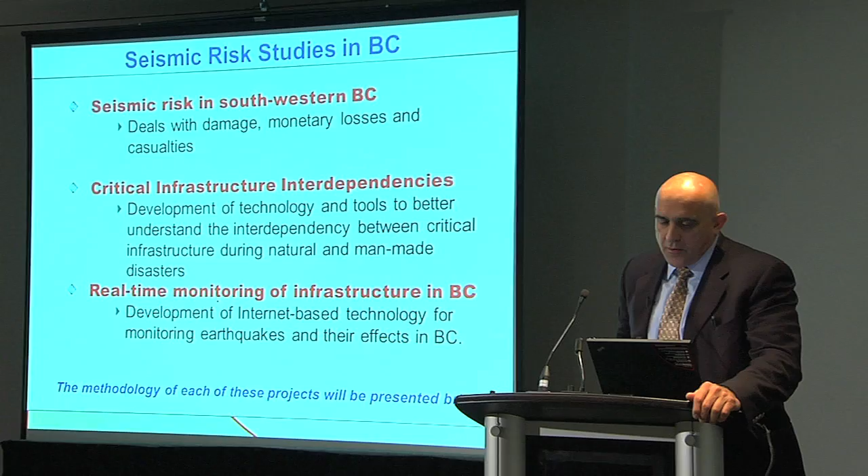So what I'd like to cover in this presentation are three topics, as shown there. Similar to what has been presented already, I want to talk about the seismic risk in BC. I'd like to give you a snapshot of where we are in terms of understanding the seismic risk, the work that we have been doing, and how we are understanding the potential effects of the earthquakes that John Adams and Gail talked about in the morning.

The second topic is a new topic that has become quite important in recent years. The government of Canada has been very, very interested in that. In fact, a number of years ago, they funded a project in developing the interdependencies between critical infrastructures. And I'm going to give you a short summary of what we have been doing, how we understand this concept, and why it's so important to start looking into this aspect as we are moving along in developing the science and the knowledge base that we have.

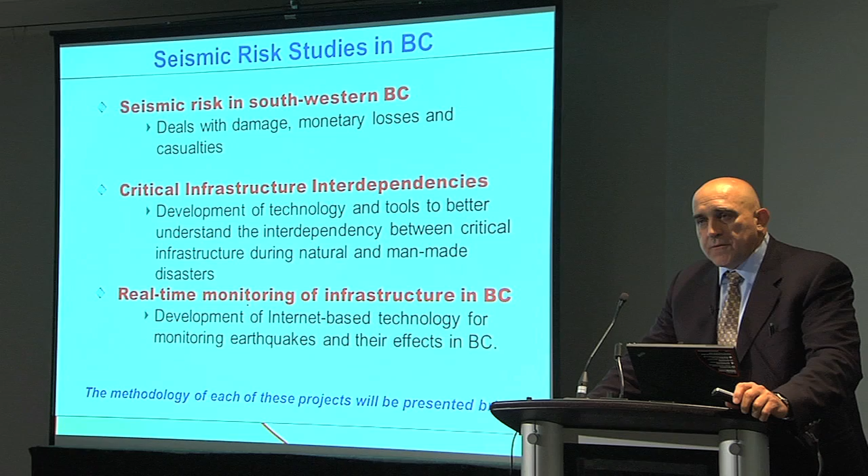And the last topic is one of the most exciting projects that we have in BC now that is related to real-time monitoring of earthquakes, notification and information that can be used by people that are interested in understanding earthquakes. Okay. So the first topic is risk.

There are many ways of looking at the risk, but if we just look at the risk in two simpler components, the vulnerability of the buildings and the hazard. And we have been talking about the hazard in different regions of the country this morning, and we understand that we have earthquakes, where they are, the type of earthquakes that are occurring in different regions of the country. But that's not enough just to say that we have a seismic risk.

We have to bring the inventory of infrastructure. I'm talking about buildings here, but that can also be related to bridges, dams, nuclear power plants, etc. All the built environment will have a certain level of vulnerability. And the combination of the two is what comprises what we call the seismic risk. So how do we deal with this problem?

First, just to summarize what we saw in the morning, we look at the probability levels of earthquakes and when they are occurring and the likelihood that they will occur in a certain region. Then we associate that with a certain level of peak ground acceleration, which is a parameter that engineers have used for a number of years as a design parameter, or another measure of the intensity of the shaking, the old traditional Mercalli intensity that is related to the level of damage that has been observed in a region.

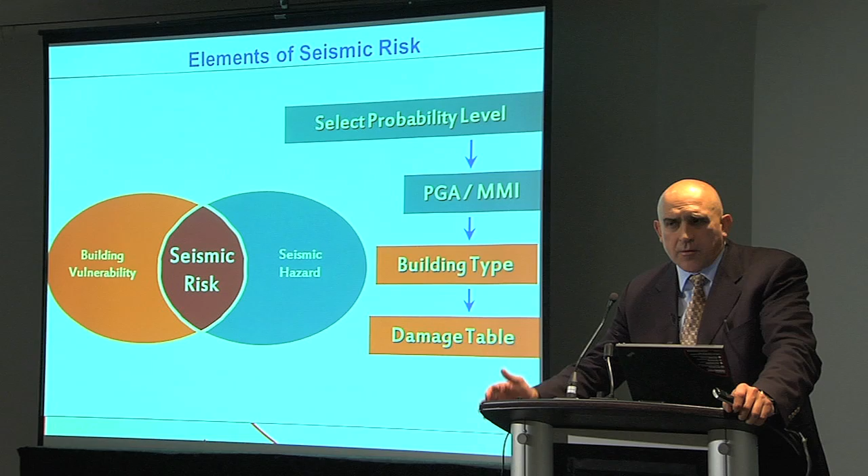A building could be so lightly damaged that people will be able to go back into the building and keep using it. We will call that 100% functionality: today the earthquake happens and tomorrow you can be at the building using it for whatever you need. Or it could be that the building is severely damaged, not only because the structural components failed, or the structural components didn't fail but the interior of the building is a mess. And you cannot use the building because it is not occupiable. So this is what we call the damage tables.

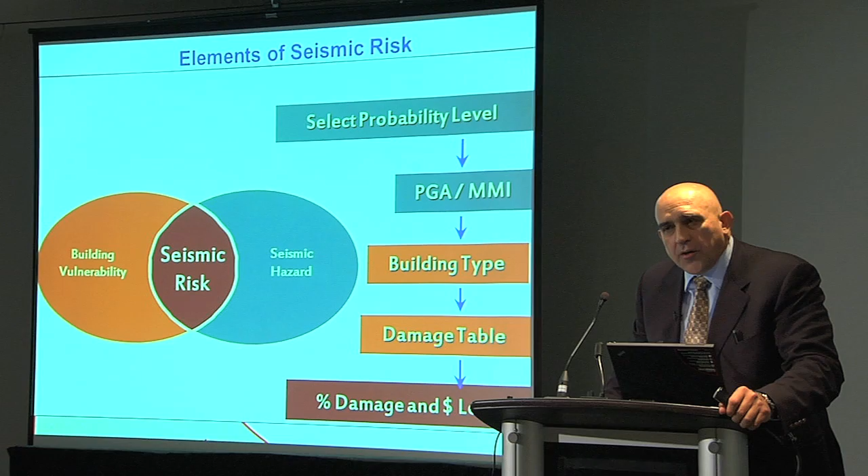And this comprises about 25,000 buildings that have been cataloged one by one. We developed thematic maps that show the distribution of the material that controls how the building will behave. For example, concrete, masonry, steel, tilt-up, etc.—stuff that engineers will love to have. Then we start seeing what regions, in this case Vancouver, have the type of material that dominates the construction.

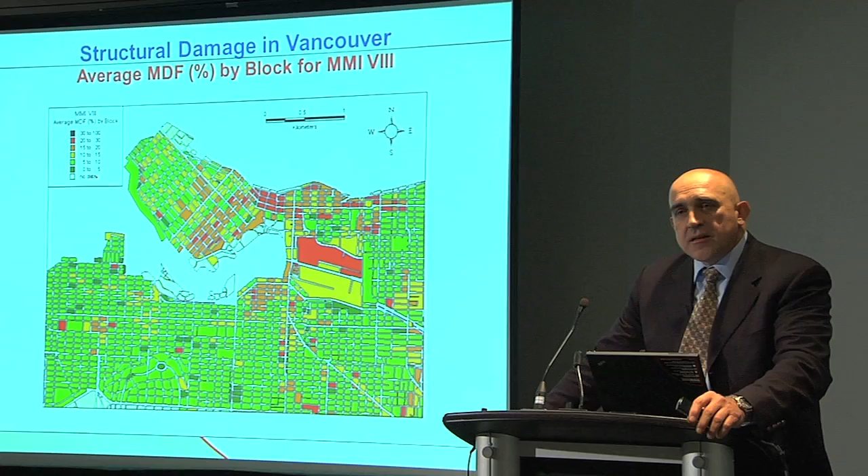That builds the inventory. Then we apply an earthquake, and in this case we assume an earthquake has happened and generated an intensity 8 on the Mercalli level, which really shows that there is going to be some severe damage.

And then we start seeing the maps of distribution of damage, in this case as a percent of the cost of the building. If the building costs $10 million, 10% will be $1 million in repairs. Then you start seeing the distribution of damage at different levels on the cost, and you can aggregate all of that to get an idea of how much it will cost to repair your buildings in that region.

And of course, then you start seeing areas, or what you call the hot spots. The red colors are areas where there is more significant damage than others. In this case, those of you familiar with Vancouver will recognize this is Gastown. It's an area where we have old buildings, and old buildings usually don't perform very well. Some of those buildings have not been retrofitted, and then you have the consequence there. But then you start looking at the overall picture of what had happened.

Darius talked about the soil conditions and the importance of that, and we can start bringing this into the model. Here's an example of Victoria, where first we do the analysis assuming the soil conditions are uniform across the lower mainland and the capital regional district. According to the building code, site class C is the classification we assume the whole of Canada is built on—that type of soil. But the reality is that we have different soil conditions.

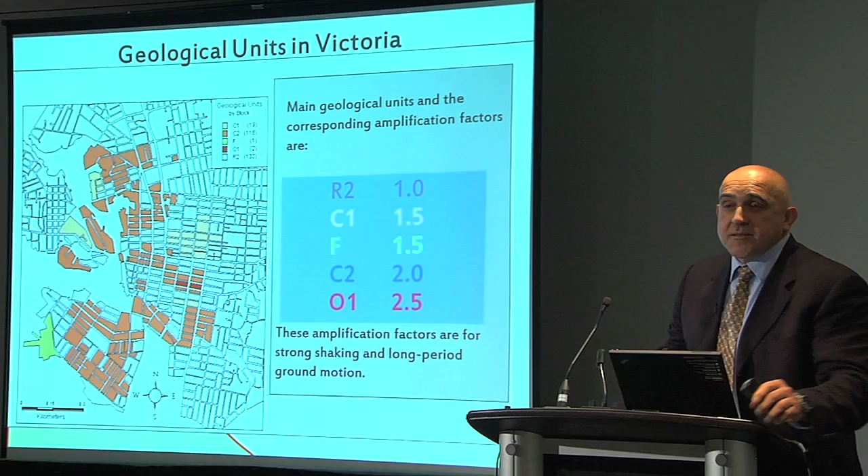Even in this small area in Victoria, you can see the variation of soil conditions. And of course, the red ones are the more critical conditions because of these types of soft soils. So I superimpose that effect in my map.

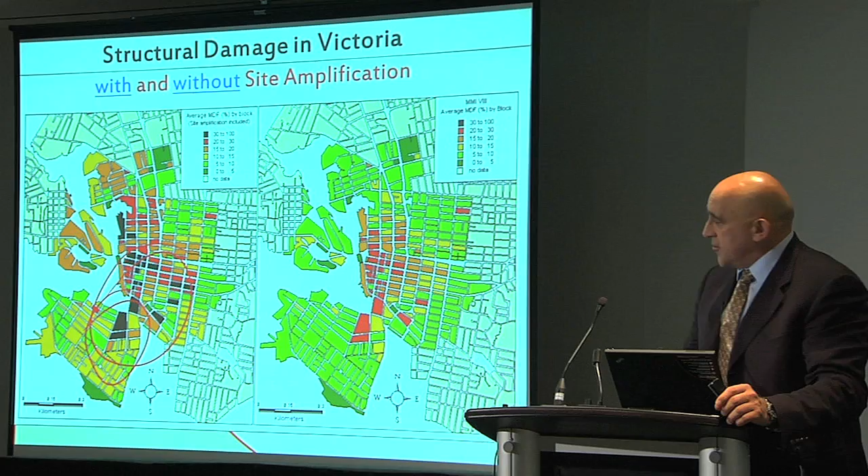And then what I have now is a comparison of the expected damage without considering soil conditions versus considering soil conditions. So I can immediately start seeing the effect of how important it is to consider site conditions in the expected performance of buildings, and get a better understanding of how the damage is going to be distributed in the region. And of course, you see that our provincial government resides here, and they are not in good shape. Then we start looking at how these monetary losses are distributed.

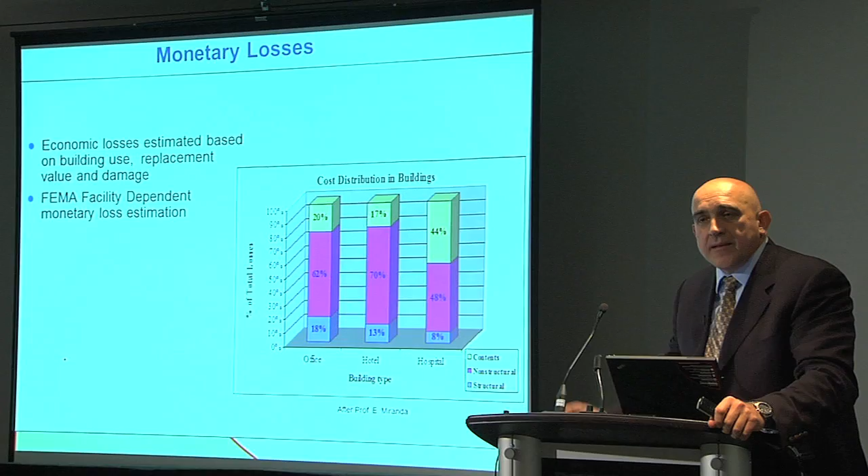Where are they coming from? This is a study done by Professor Miranda at Stanford that pretty much summarizes where the cost is coming from. Here is an example of typical office buildings, hotels, and hospitals. Although we engineers always concentrate on the structural damage, you can see that the most significant contribution to the cost of repair is the non-structural components—the inside of the building. I would say in general about 75% of the cost is associated with repairing inside the building.

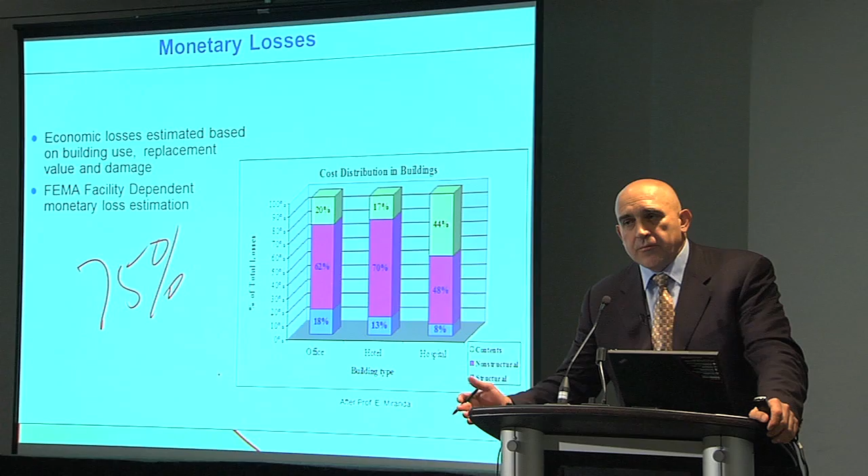So where is that coming from? From lessons learned from past earthquakes—studies that have looked at the damage distribution. For example, in a hospital, the non-structural elements and the contents become very important, because if they fail, although the hospital might be seismically adequate or have been retrofitted, if the contents fail, you cannot use the hospital. The hospital will not be operational, and that's not acceptable—it has to remain operational after the earthquake. So this is how we are learning more about this distribution.

Then we start looking more carefully at what these non-structural elements are and how they fail. Some of those elements are more sensitive to the level of shaking in the building. Others are more sensitive to the displacement between the roof, the floor, and the ceiling.

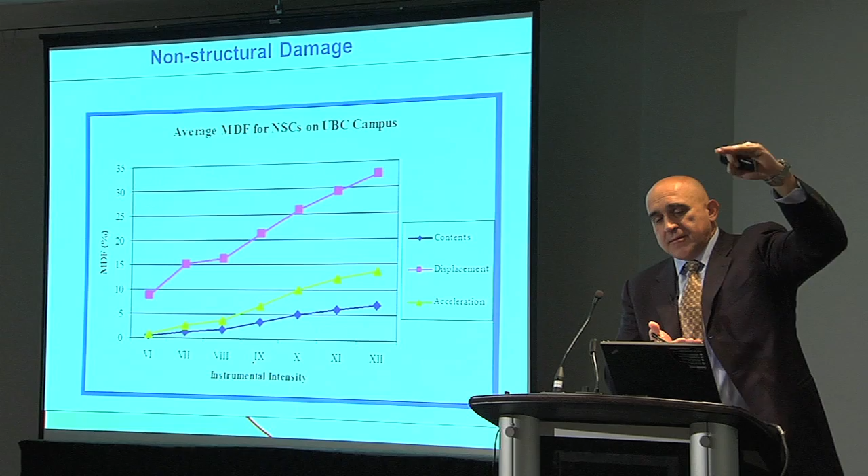If you just look at the doors here, and we have an earthquake, the door will jam because the ceiling moved relatively to the floor significantly, and the door is jammed. That will be called a displacement-sensitive component.

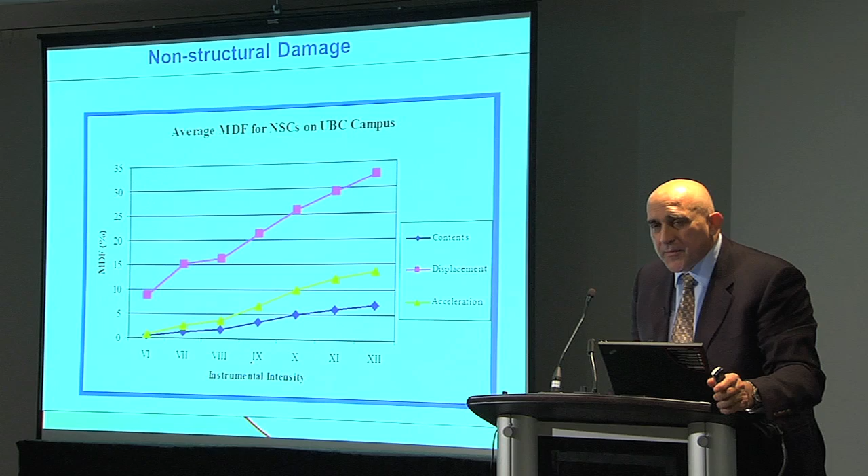Whereas, for example, the sprinkler systems or the air conditioner and everything that is hanging from the roof is more sensitive to the level of shaking, the acceleration. It will be damaged not because the roof or ceiling is moving, but because it's moving very fast.

So now we can see the sensitivity of these components to the level of shaking. The rest is the contents, the desks, the tables we are using, how they are damaged. We start seeing that at some point, the significant contribution to the damage is coming from the elements that are displacement sensitive. Those are the ones that are going to be most costly to repair.

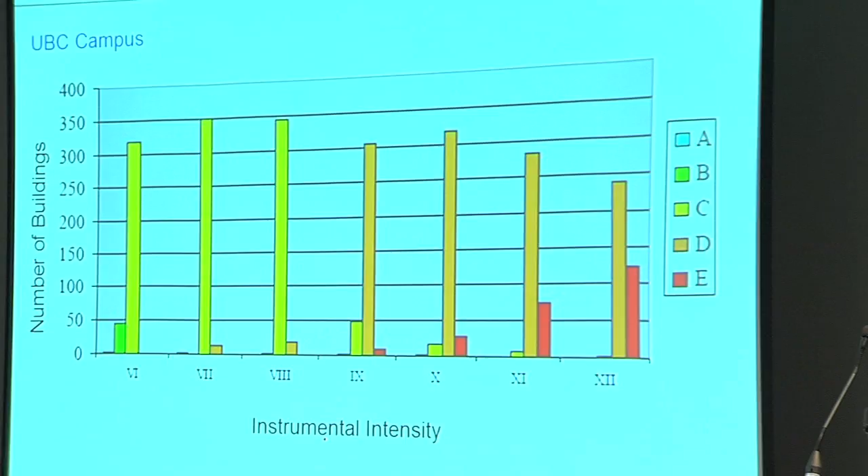Then we also can look at how a building will remain or will be functional after the earthquake. This is a study that we did for the UBC campus. I'll address that in more detail later on.

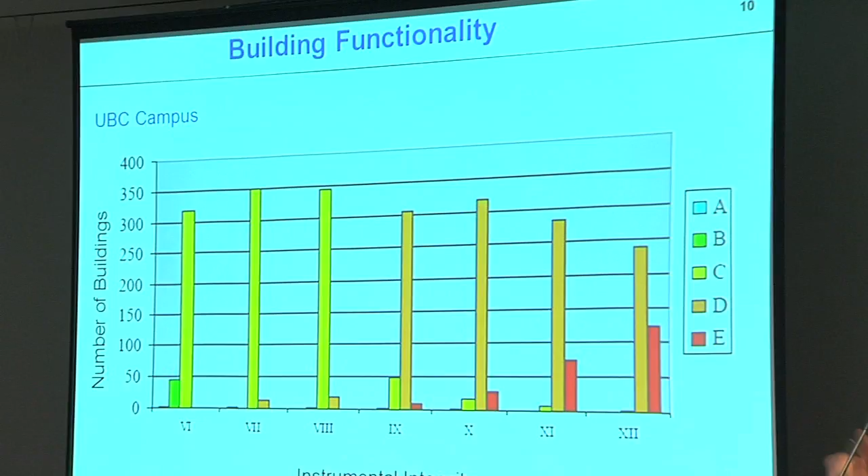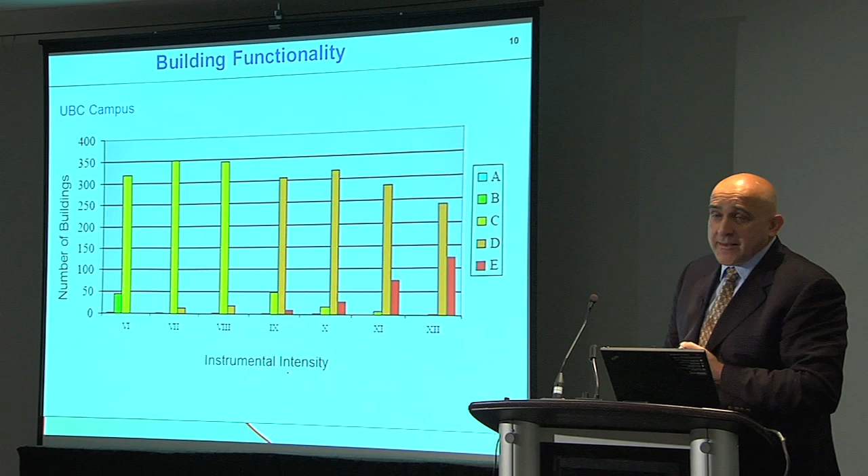Of course, you can see that the red color is a building that is not useful. Why is that? Either because it has very severe structural damage, or because the contents do not permit people to use the building. It could be a laboratory where there is a big mess and you might have an environmental impact or something like that, and that will be considered a non-functional building.

So again, we start looking at the picture of at what point a good number of your buildings are not functional because of a number of parameters.

An example of the collaboration that we've been having with different groups in BC - I'd like to share with you some preliminary results of this effort. There is an effort in BC now to adapt the HAZUS methodology, which some of you might be familiar with. It's a methodology to do loss estimation in the United States. It's Hazards US, it stands HAZUS for. We are currently working with the FEMA people in the US to adapt the HAZUS methodology to Canada.

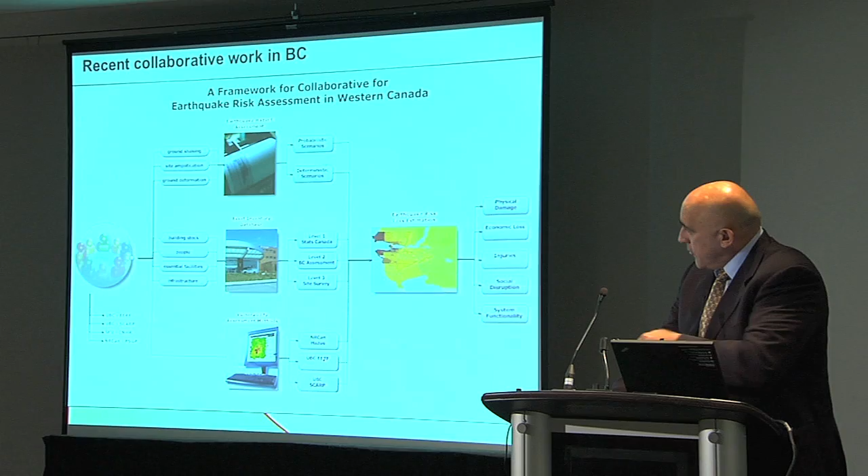We have been using the West Coast to see what needs to be changed, adapted to the situation that we have. The building types that we have in BC are somewhat different than the ones built into this HAZUS model, the soil conditions, the type of earthquakes, etc. But I just wanted to share with you this effort, which is a collaborative effort between UBC, SFU, and Natural Resources Canada as part of that group.

And we started tackling this problem. The goal of this effort is to have, at the end, results that are very consistent - not that UBC is providing results and SFU is providing results that might be contradictory. We try to get together, compare results, and then issue a consistent message to the people so they don't get confused. And we go through the whole process of developing the ground motions, understanding ground motions in BC, the building inventories.

We have different levels of building inventories, starting from Statistics Canada, the information provided there that is very fast and easy to obtain. Maybe go to the provincial government and get information from the BC Assessment Office, get another level of information, or just hit the streets and do a survey of the buildings. We have all of those done.

The examples that I showed you earlier were based on a level 3 survey where we catalog all these buildings, and presently, including Victoria, Richmond, Vancouver, and the North Shore, we have about 150,000 buildings that have been cataloged through this process. But that takes time.

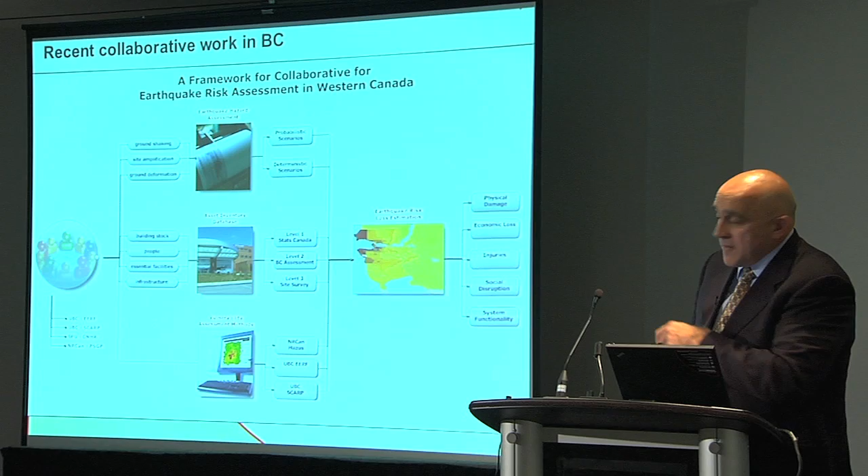Whereas if we just go to the level 1 assessment, it's much faster. You just use information that is already developed. You accept that the information is not complete, that it has drawbacks, but then you can start using it to start seeing some information. I'd like to show you some of the preliminary results that we have obtained through this collaborative effort for level 1. That information has been used recently for a workshop that we had with TransLink.

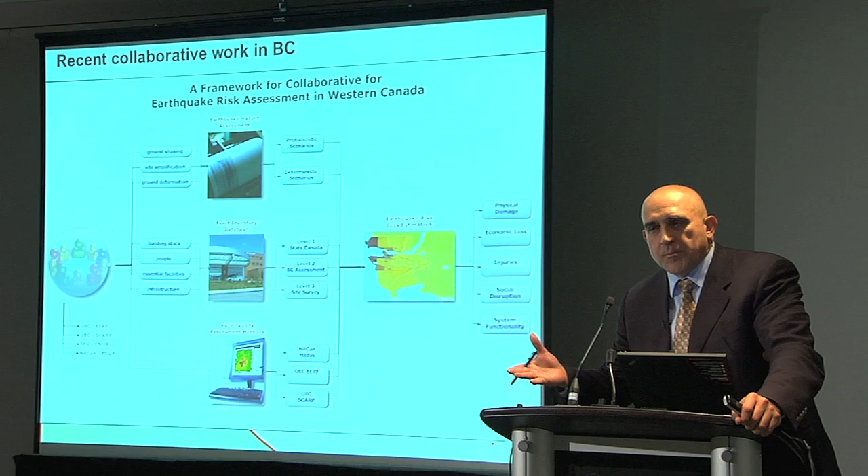TransLink was concerned about their capability to respond to an earthquake based on what they saw in Japan. Of course, TransLink has its own emergency response plans, but they were concerned about the ability to interact with other groups like BC Hydro, the gas company, telecommunication companies, to ensure they were speaking the same language and could come out with a consistent effort in how to respond to an earthquake.

I want to give a disclaimer here, because I'm going to show you some estimates of potential economic losses and other losses, but they are based on very simple models. They are of a very preliminary nature, but the idea is just to illustrate what we are learning and how these tools are working.

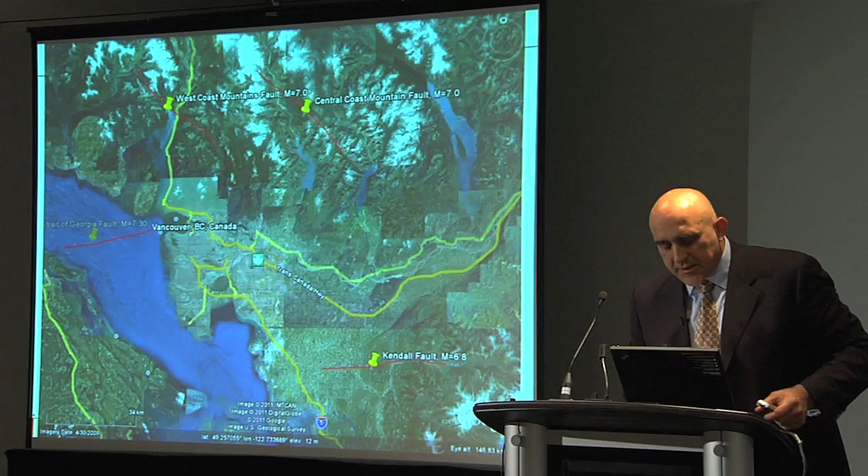So we look at three possible earthquakes. One in the Strait of Georgia, another on a fault called the Kendall fault, and a simulated Cascadia subduction earthquake. We looked at what the consequences of those earthquakes would be in the lower mainland.

We first develop a shake map, an estimated shake map for a Cascadia subduction zone earthquake, magnitude 8.2 in this case, showing the distribution of intensities. The hotter the color, the higher the expected level of shaking and damage in that region.

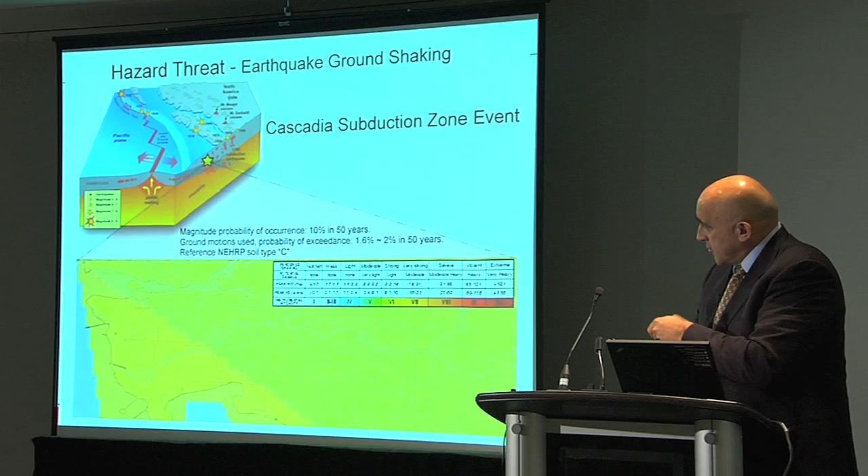Then an earthquake in the Georgia Strait. Now you see how the colors change, because although it's a smaller earthquake, it's much closer to the urban areas, so the level of shaking will be more severe in the downtown area. Then the Kendall fault, although much farther away from Vancouver and Richmond, it was interesting to see the potential consequences of that earthquake there.

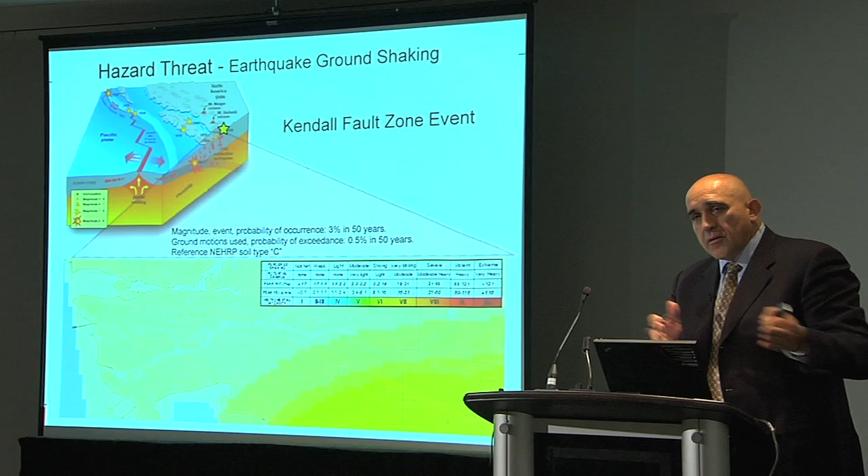So that's the hazard. Now we start building up the inventories. We also look at soil conditions, because as I mentioned, they are important, and we look across the whole lower mainland at areas where we expect significant amplification of the ground motion. We have maps like these that allow us to do that.

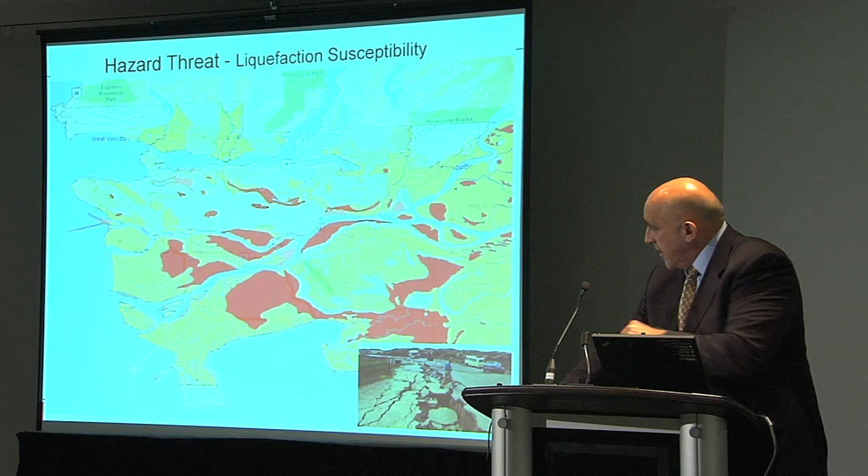We can also look at liquefaction potential, which is important, especially in the Delta region. Here, the red areas show where the potential for liquefaction is much higher. Liquefaction typically has a severe impact on infrastructure, and we have to account for that effect as well.

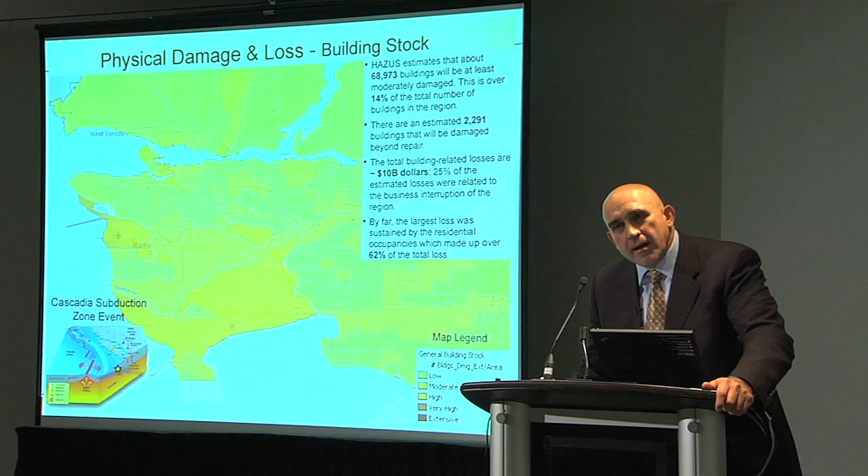Here are some of the results for the subduction earthquake, using the HAZUS methodology. These numbers are very preliminary, but for comparison purposes, about 70,000 buildings are severely damaged according to this scenario, with economic losses of about $10 billion, of which 25% is related to business interruption. The largest loss was in residential construction—not the tall or fancy buildings we usually analyze as engineers, but regular homes that are going to be more problematic in this case.

Now, if I change the picture and move to the Strait of Georgia earthquake, the number of buildings affected increases to about 130,000. The economic losses have now doubled because more buildings are damaged, and again residential construction accounts for about 68% of the losses.

The third one, as a reference point, is the Kendall fault, which has less impact because it affects an area that is less populated so far. We're looking at about $1.5 billion in damage, about 10,000 buildings damaged, and in that area the losses in residential construction still tend to be very large.

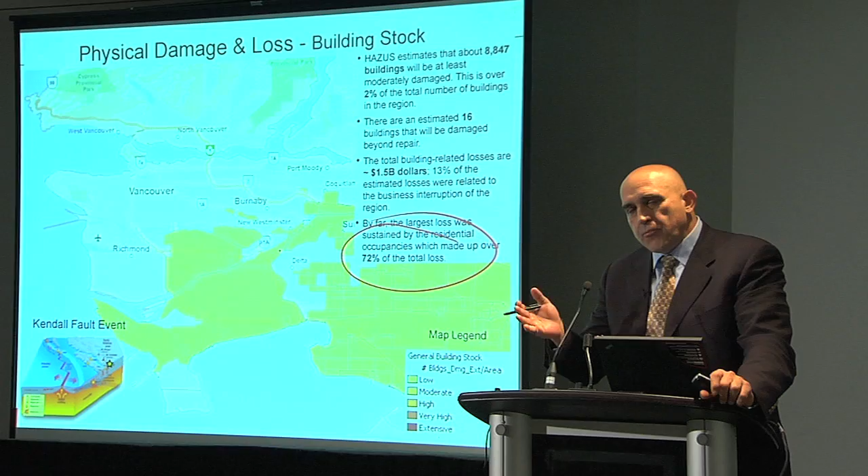So this is what we are learning from these studies: what buildings will have the most severe impact, and what tools we need to develop to control and manage that risk. We can also look at the number of people affected by these earthquakes, again across the three scenarios. For the subduction event, about 15,000 people will need shelter.

About 25,000 households will be affected. Then the question is how long it will take for these houses to be repaired. If people claim insurance, how long will it take for the insurance to pay, and how long will it take for these people to find a contractor to repair their homes?

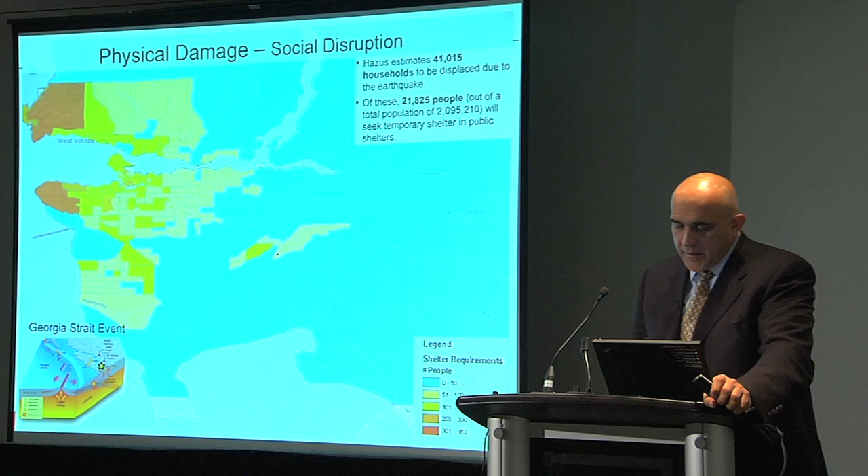For the large, closer earthquake, because it's affecting a more significant area, we have about 41,000 households, of which 22,000 people are going to start looking for shelters. Comparing to the farther away earthquake, the numbers tell you this: about 700 and less than 500 people being affected or needing shelters.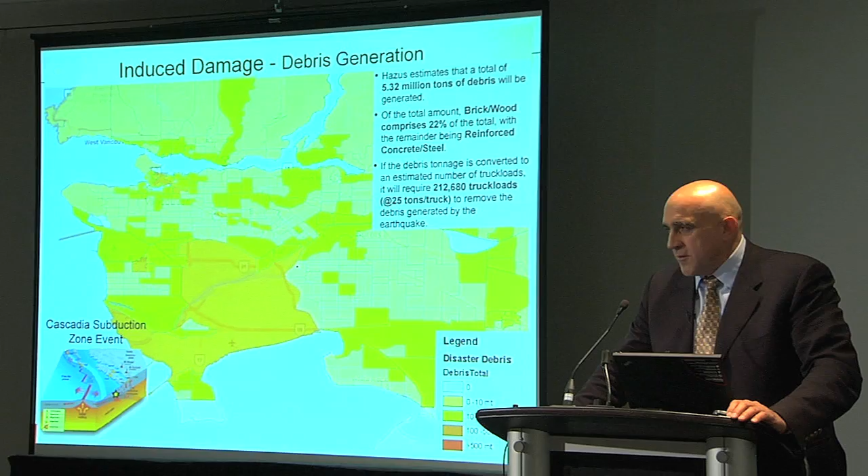Another important aspect was debris generation. The earthquake in Japan generated an incredible amount of debris, and in fact people in Tofino and Ucluelet are now starting to see some of this debris reaching the west coast of Vancouver Island. People are starting to collect some of the belongings and try to put them together to eventually ship them back to Japan. So debris generation is very important to consider in the effects of earthquakes.

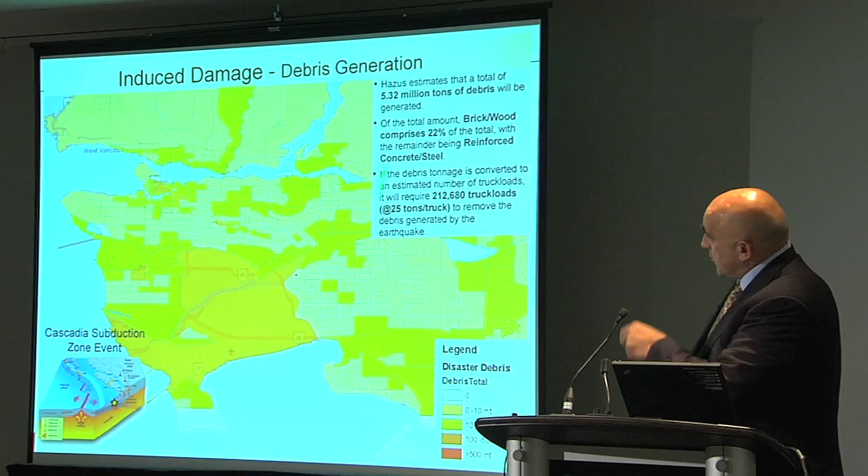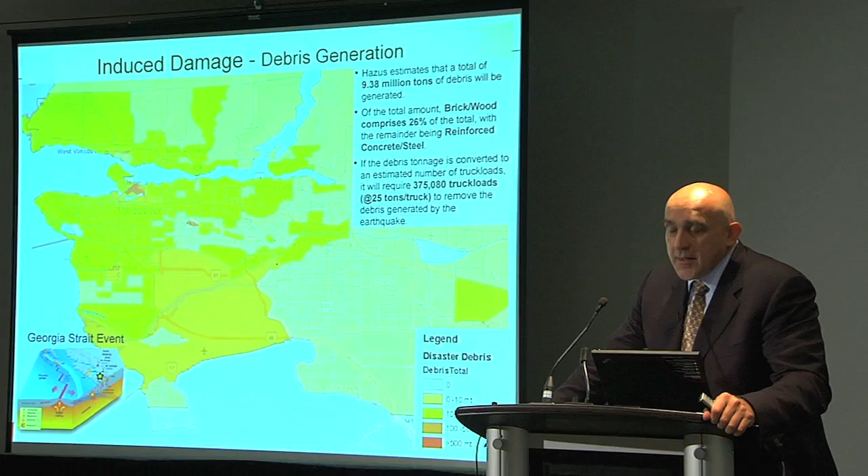Here are the estimates for this subduction earthquake: about 5.3 million tons of debris, mainly from reinforced concrete. That means taking about 200,000 truckloads to ship that material somewhere, we don't know where. For the Georgia Strait event, now we're talking about 10 million tons of debris, and again about 400,000 truckloads to transport that material somewhere.

For the Kendall earthquake, much smaller in impact, not necessarily smaller in size, we're talking about 0.3 million tons and about 13,000 truckloads. I hope this gives you an idea of the tools we have. Of course they have to be refined and the models verified, but at least these tools are available now, and it doesn't take much time if you have all the information available. The information I presented here was based on census tract information, so that needs to be verified to ensure the model is working properly.

The second topic I have is tied to the first one. So far I've been talking about individual buildings or bridges failing or becoming non-operational. But what happens when we start looking at the domino effect? What if one infrastructure fails? What is the domino effect on the other ones? This is what we call the interdependencies.

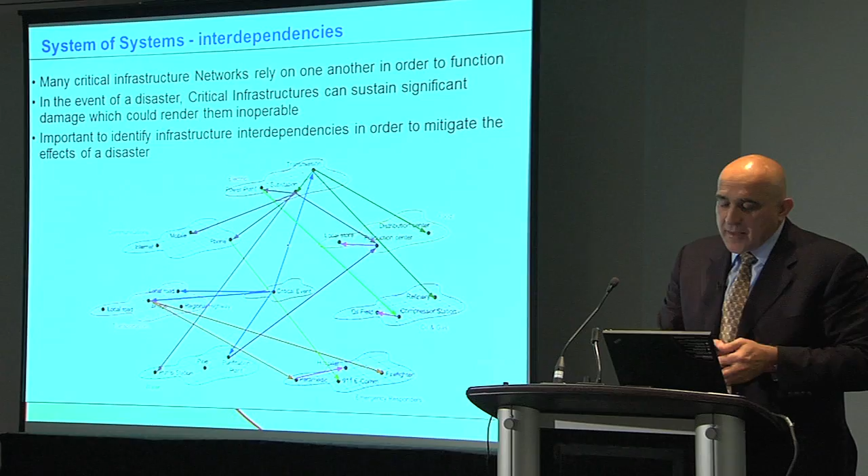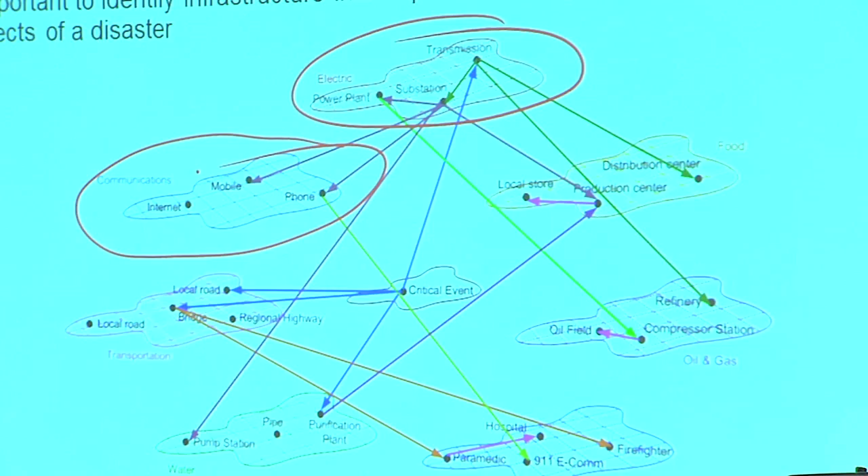Here is just a cartoon to illustrate the concept: we have electric power, which is tied up to communications somehow. Communications needs power, and electric generation also needs communication. That's the concept of interdependencies. As you can see in this diagram, it's very complex, and it starts becoming an incredibly intricate analysis.

The question to us was, do we have a way to start looking at this problem, at least to start getting a sense of what happens? So this is how we did it.

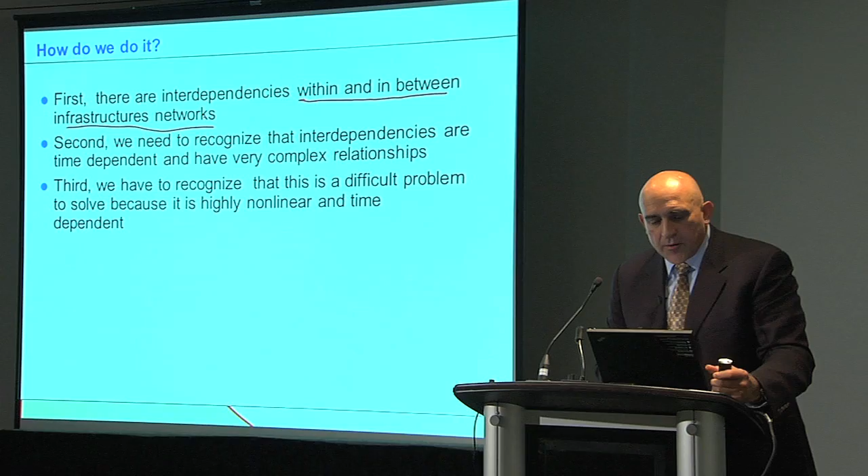We recognize that there are interdependencies within and between infrastructures, that these interdependencies are very complex relationships, and that this is a very time-dependent problem, the dependencies at time zero immediately after the earthquake will be very different than the interdependencies an hour or two hours later, or a week later. So how do we do that?

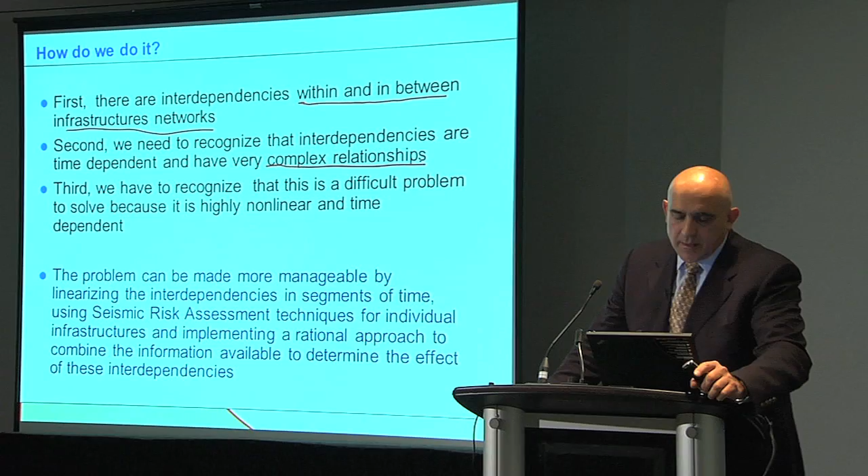We got together with a bunch of researchers at UBC in electrical engineering, computer science, engineering, etc., and we tackled the problem of how to solve this. We developed a concept called a simulator, similar to what pilots do when they train for airplanes, simulating situations so pilots are trained to react without crashing a real airplane.

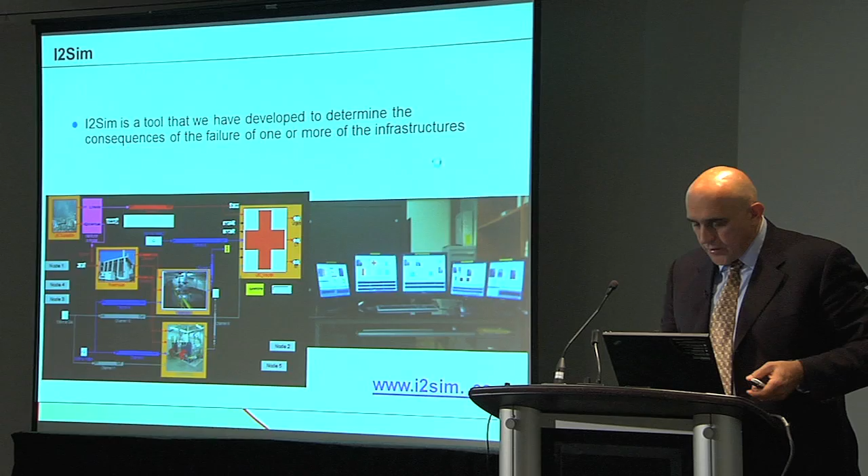We use a concept called visual analytics, bringing a lot of information and putting it in simple ways to look at. We call this the production cell, which could reflect a hospital or a substation, and that will depend on a number of parameters.

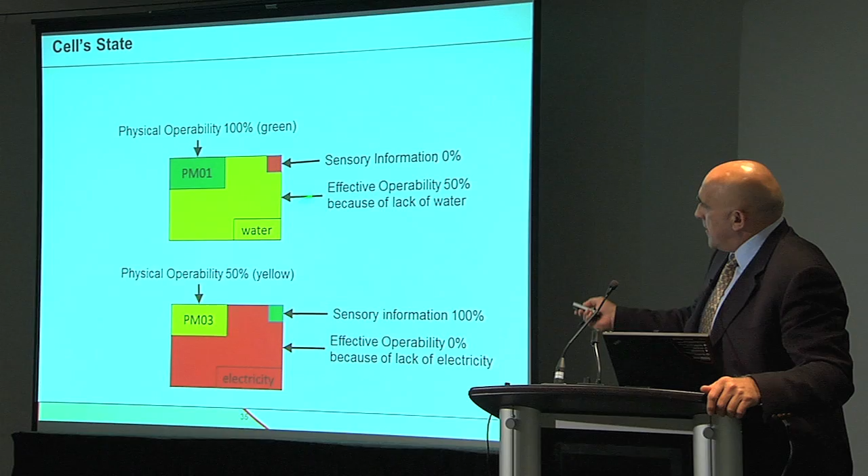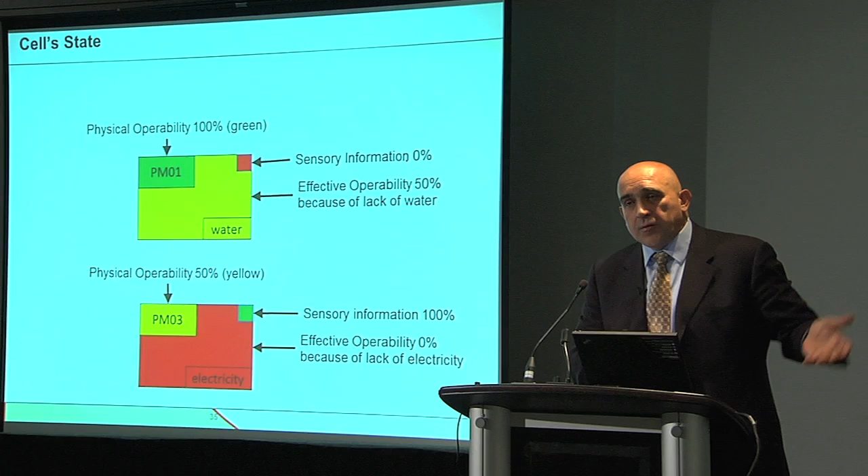And all these squares here are related to communication layer, the decision layer, the damage, production, etc. So then you start looking at in this model, for example, at the water cell, information is coming from sensors, information is coming from being physically operational, and whether it is 100% operational or 50% or 10% operational, and how is that going to affect other infrastructures. So you start developing models like this, that you have one cell connected to another one, but to transport information or the output from one cell that is going to be the input to the other cell, there will be other parameters that will have an influence on that.

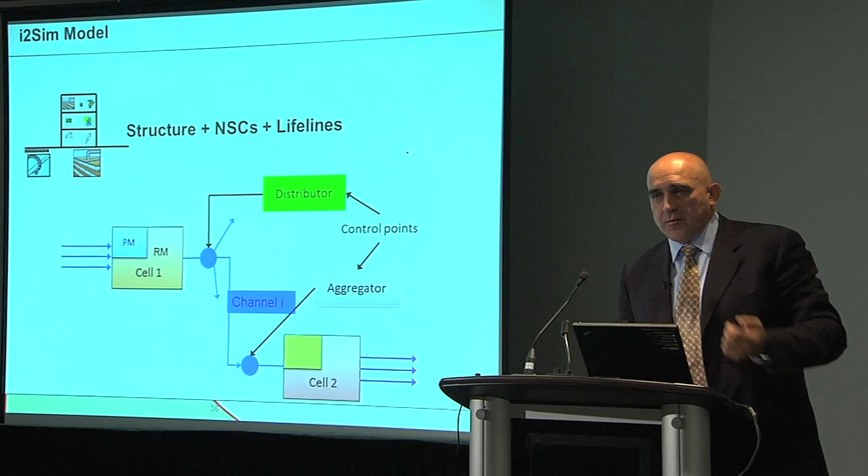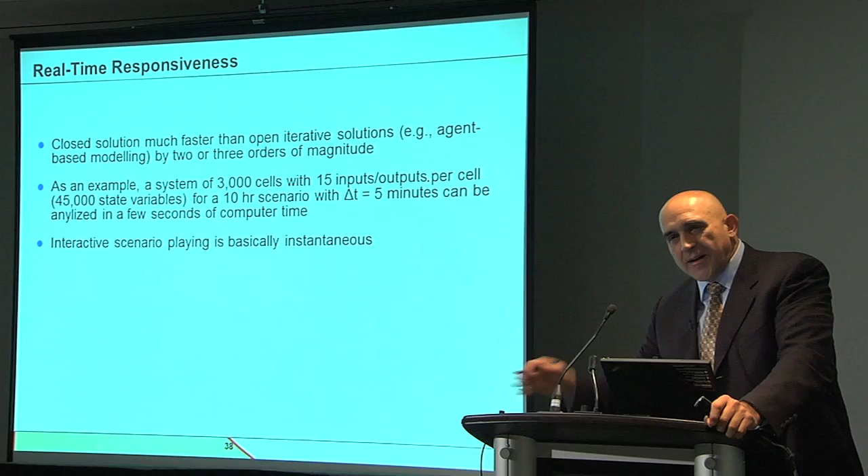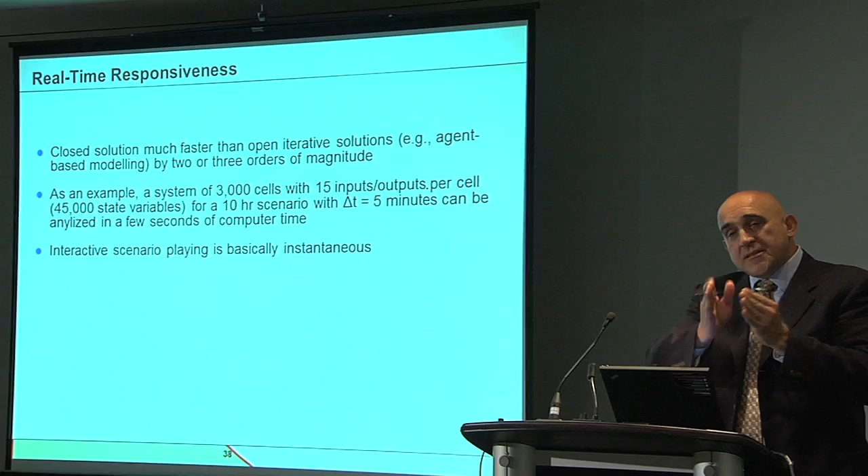So then you develop that, solve that mathematical problem, and then, ta-da, you have a very effective way of looking at that problem. We use very advanced, sophisticated techniques to solve very highly nonlinear problems, but at the end, what we have is a tool that can analyze these situations in a very, very fast way. For example, a system with 3,000 cells, 3,000 infrastructures, with 15 inputs and outputs each, to simulate a 10-hour scenario at 5-minute steps, it just takes a second or two to do this simulation. And of course it's an approximation, but here's an idea of how the results are looking.

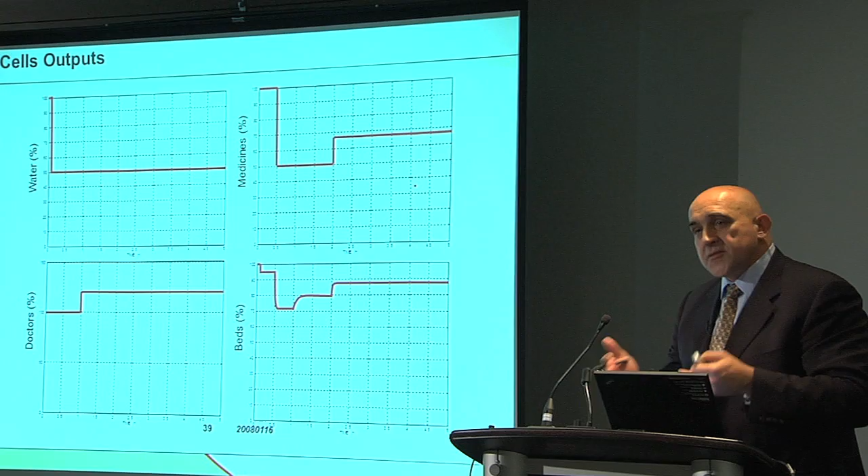For example, this is how the water system, this is for the UBC hospital, how the water will come to the hospital, the doctors, at what point the doctors will be able to come to the hospital, because with no doctors, there's no way to treat patients. So then we start looking at doctors, nurses, medicines coming, at what point you don't have enough medicines, the hospital cannot operate as expected, so you have to wait for medicines to come, number of beds that you can produce. Typically hospitals have a certain number of beds and can treat a certain number of patients, etc. So that starts giving you a sense of how you're going to recover your operations through these simulations.

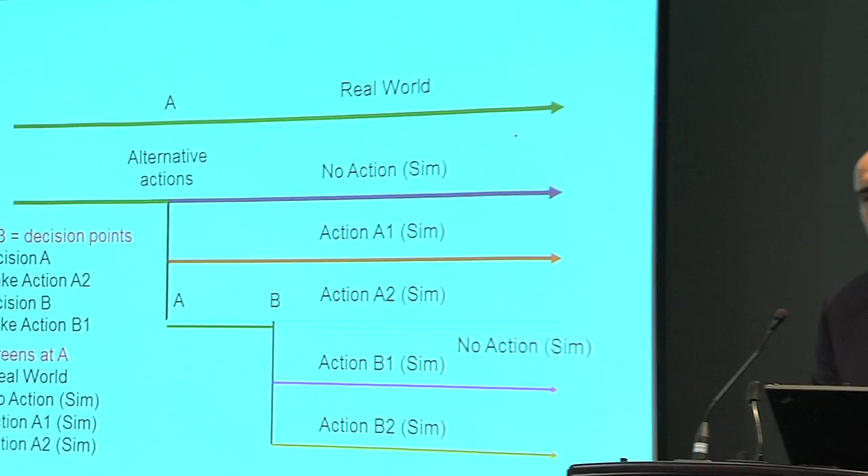You can also do what-if analysis. For example, this is the real world, and let's say in this simulation you make a decision and you want to see what is the effect of your decisions. You have no action, you don't make any decision, it goes this way. You make another decision, and then you can go through all these branches. And that's why the simulator is essentially, as I was saying, related to what flight simulators are doing, developing a number of scenarios that can be used for that case.

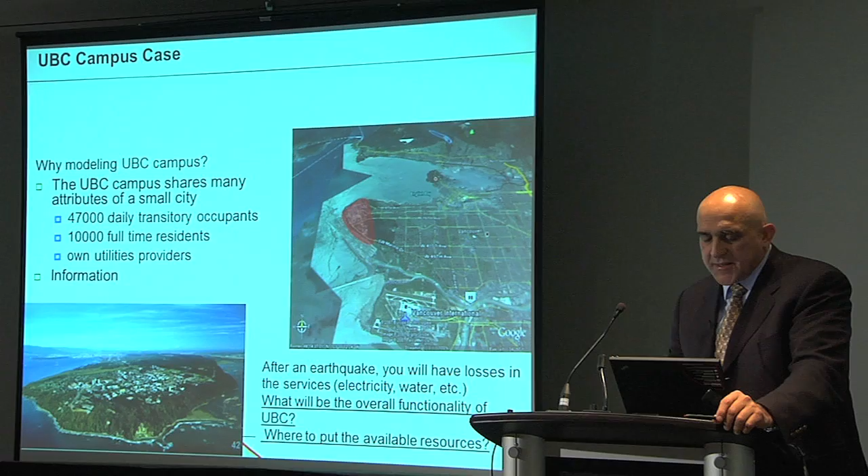Briefly, to show you how this is being used, we took the UBC campus, because it's a small city. We have, today, about 50,000 people on a day-to-day basis, a number of buildings. It's a city in itself, it has all the facilities. So we did a study for that. We started looking at the campus network, for example, the electrical network, the gas network.

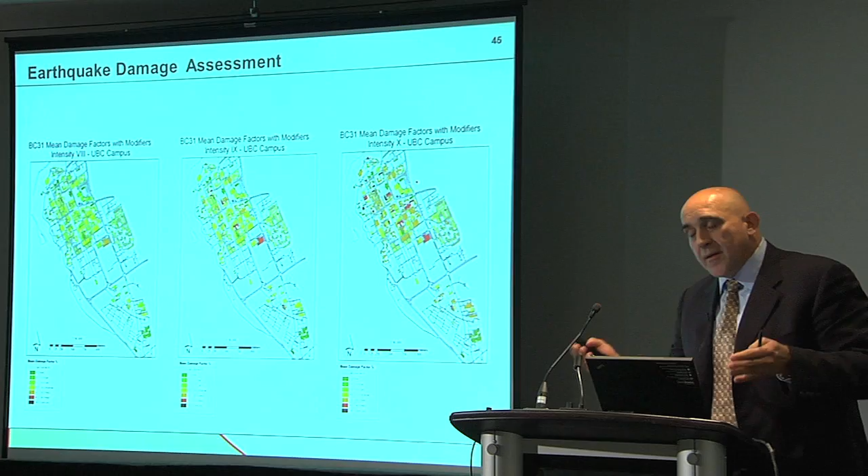We catalog all of that. The fiber network in the campus, we start looking at that. Then we start looking at the damage assessment of buildings on campus for different levels of intensity. And you see, as the intensity starts growing up, the buildings are starting to have problems. But right now, we have not connected that to the interdependencies.

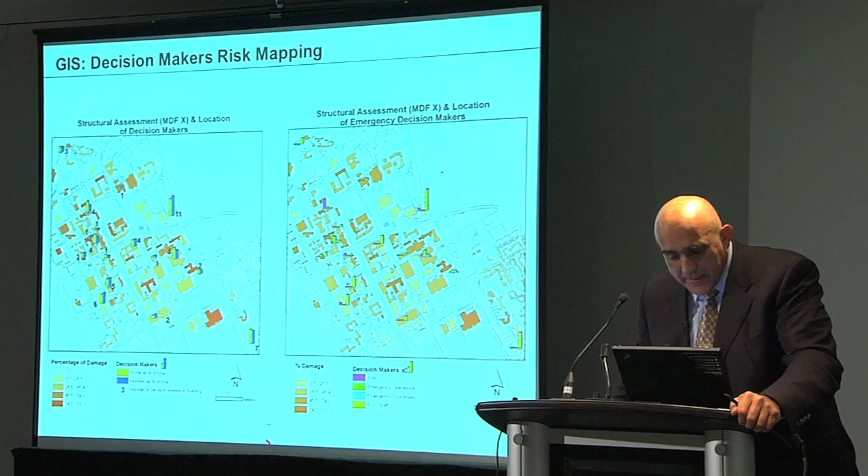Then we start looking also at where are the decision makers, and which buildings are they occupying. And the office of the president, I will not show you where it is, but you might know it, is in one of the buildings that probably will have serious damage. And where are the people that control the emergencies, the emergency response group, where are they located with respect to campus.

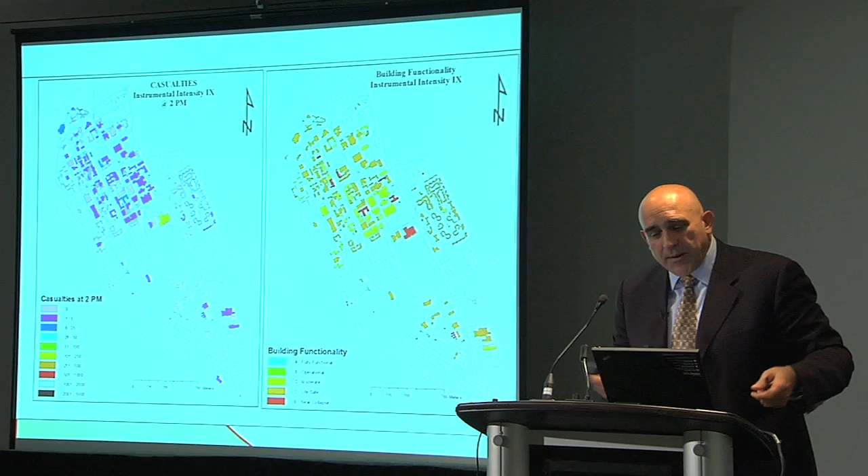So we start looking at these elements that are part of the critical infrastructure, the decision makers, okay? Then we also look at the possible casualties if the earthquake happens at 2 in the afternoon or at a later time. At 2 in the afternoon, most of the students will be on campus. At 2 in the morning, most of the students will be at the pubs and having fun. So that changes the picture, right? And then we start also looking at the building functionality.

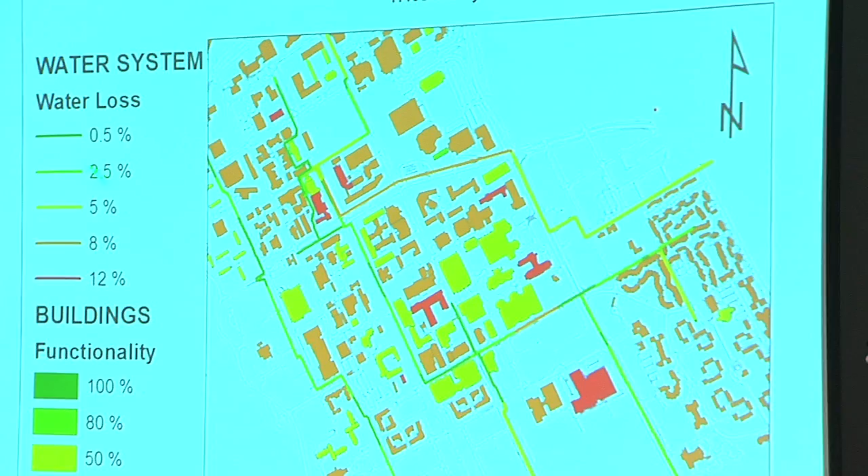Now let's see how the water system interacts with the building functionality, just to illustrate the process of interdependencies. So here we have the water system network, the expected losses from the water system, pipes breaking, etc. And if you just put the two, one on top of each other without looking at the interdependencies, this is how the map will look like. The level of damage to the buildings in functionality, and the number of water losses that are expected in all the pipelines. You don't know how the buildings are being affected.

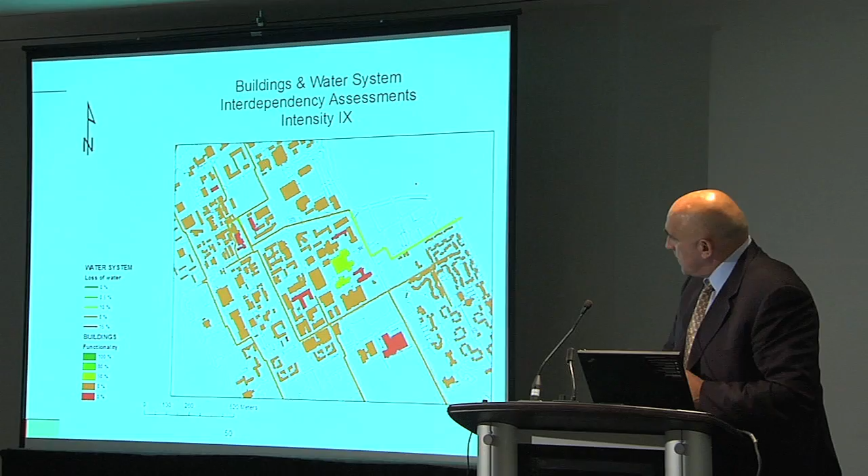But once you include the interdependency, you can see that the picture has changed significantly from this to this. More buildings have become non-functional because they don't have water. As simple as that.

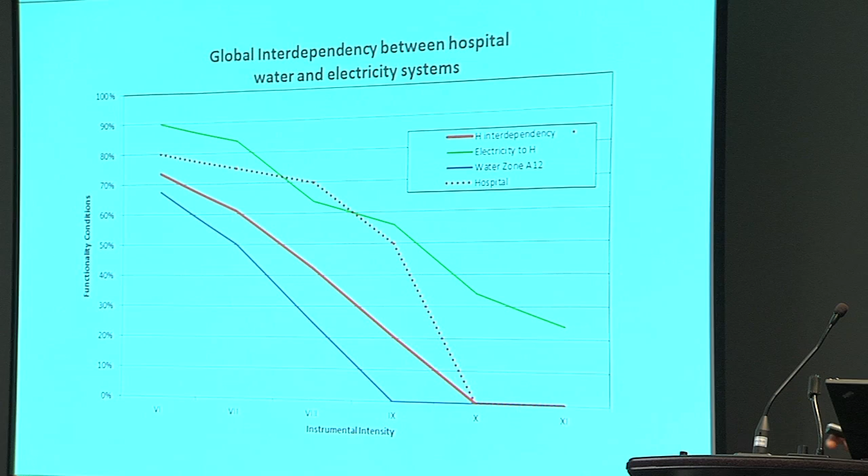Okay, the last example is the hospital at UBC, because it's a critical component in Vancouver, and the hospital depends on the steam, water, electricity that goes to the substation, and then a substation feeds into the hospital. So if we look at the hospital functionality by itself, you might be looking at this dotted line. But once you start building the interdependency of that hospital to electricity and water, then you can see that the functionality is very different. And that is a very valuable tool because then you start seeing why this is coming from this one to this one and what you need to prevent this from happening. And this is how we are using this information.

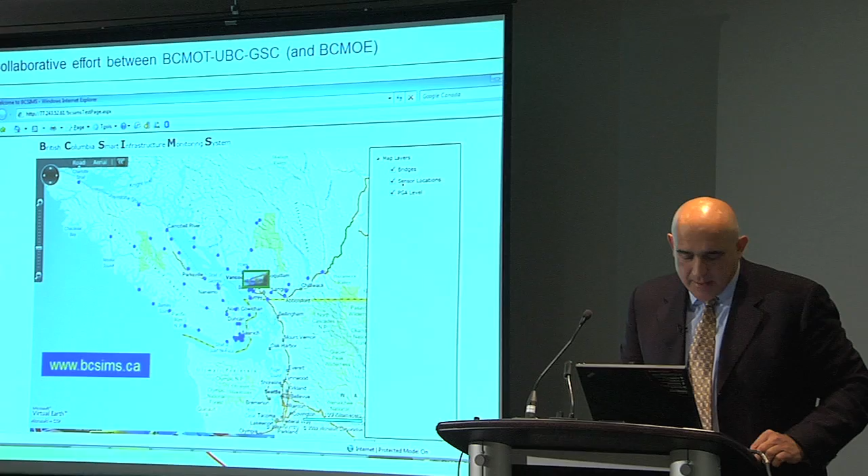The last topic that I wanted to present to you is the most recent development that we have in BC. It's a collaborative effort between the BC Ministry of Transportation, UBC, the Geological Survey of Canada, and the BC Ministry of Education is coming into the picture. And the idea is to develop internet-based tools to monitor earthquakes, not only to find out the level of shaking, but also to find where the earthquake has affected, the effects of the earthquake, how structures have performed, because there are a number of structures that have been instrumented.

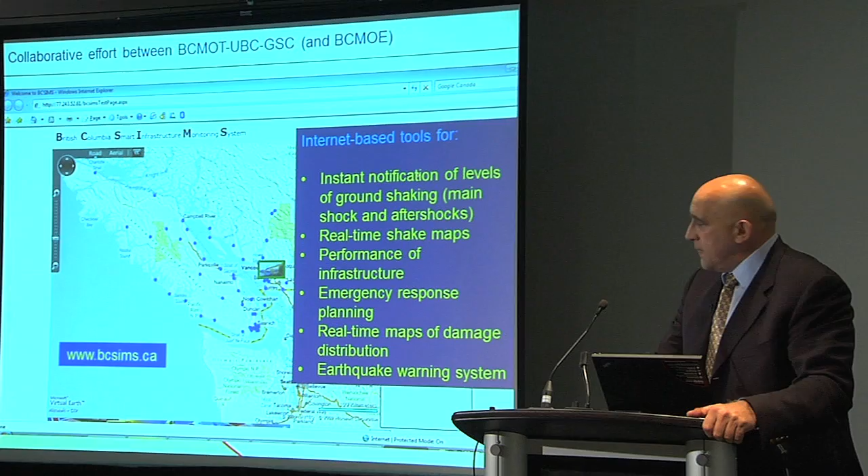We are targeting 40 bridges with the Ministry of Transportation. So far, we have 12 bridges already instrumented. 4 are already online. I'll show you in a moment how this works. The plan is to instrument also at least 40 to 50 schools in the province to monitor earthquakes. And also, we're currently developing an earthquake warning system as a collaborative effort between the 3 organizations. Essentially, the Ministry of Education is interested in putting an earthquake warning system in the schools so teachers and children can at least start reacting if an earthquake happens.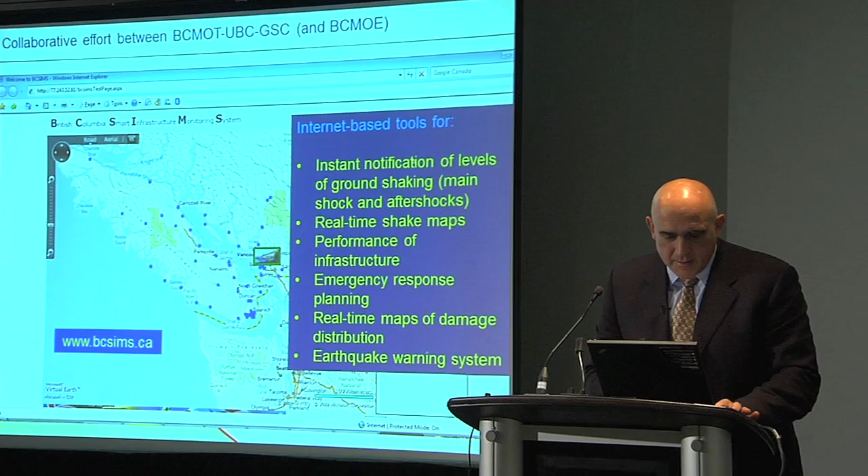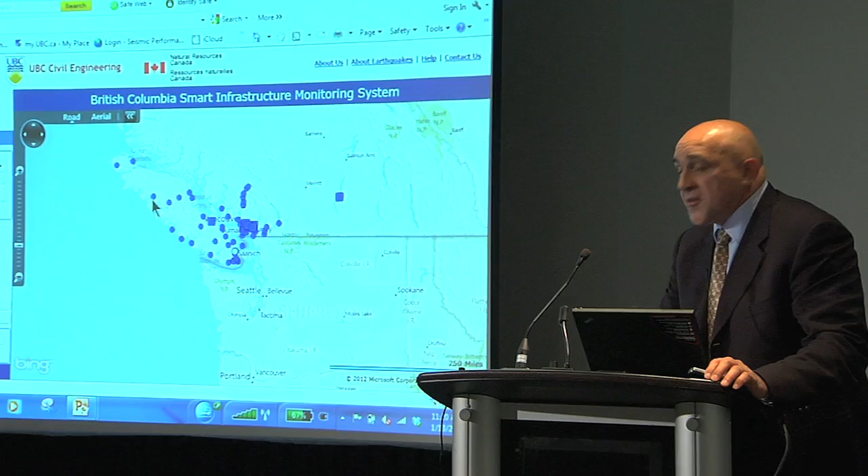So let me see if this works. I'm going to go to the internet. It's very short. Okay. So here is BC. All these little dots that you have here are essentially stations that are connected to the internet. The circles are ground stations that are monitored by the Geological Survey of Canada, and the little squares are bridges that have been instrumented.

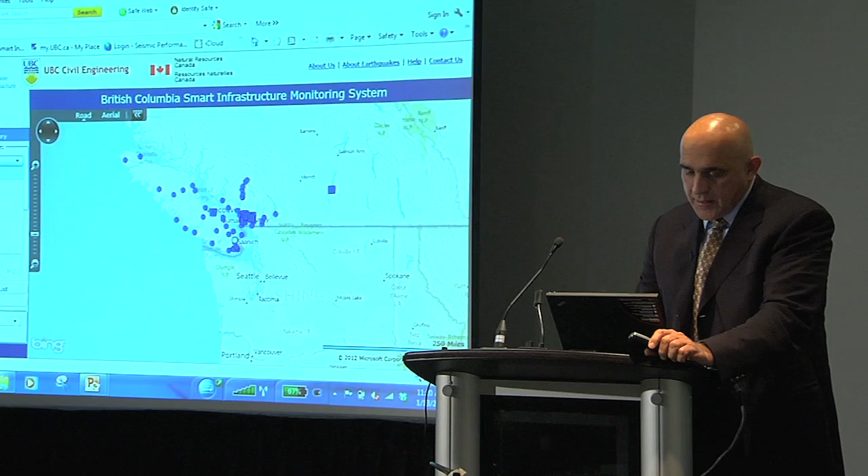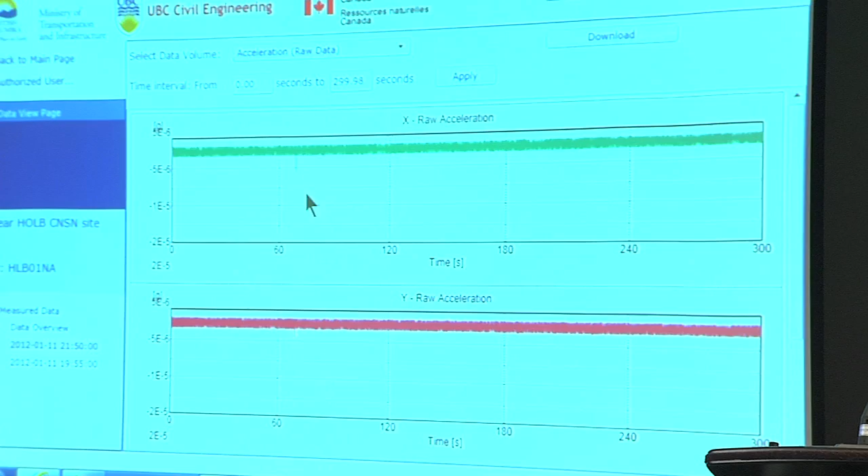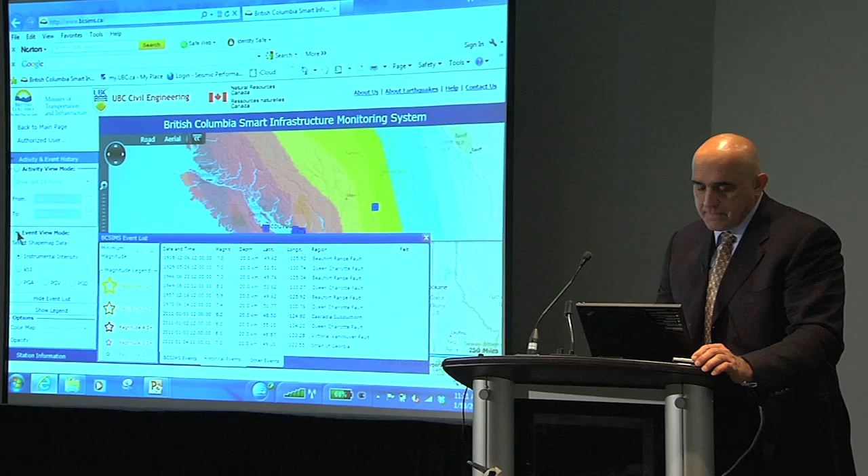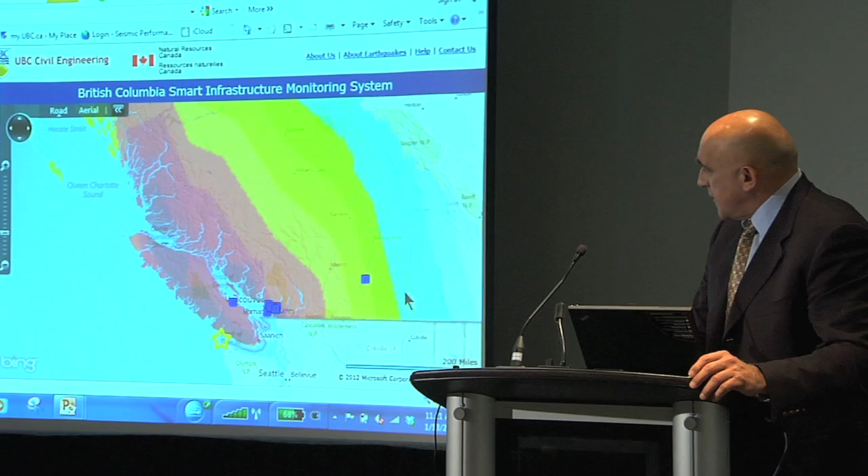For example, we have simulated a number of historical earthquakes. Let's say we also simulate an 8.2 earthquake in Cascadia, and here you have the shake map that shows the distribution of damage or the intensity, and this is essentially to verify the system. The squares that you have here are the bridges that are already online that could record information, and if you click on one of these things, it will bring you into the site of the bridge that contains information, etc.

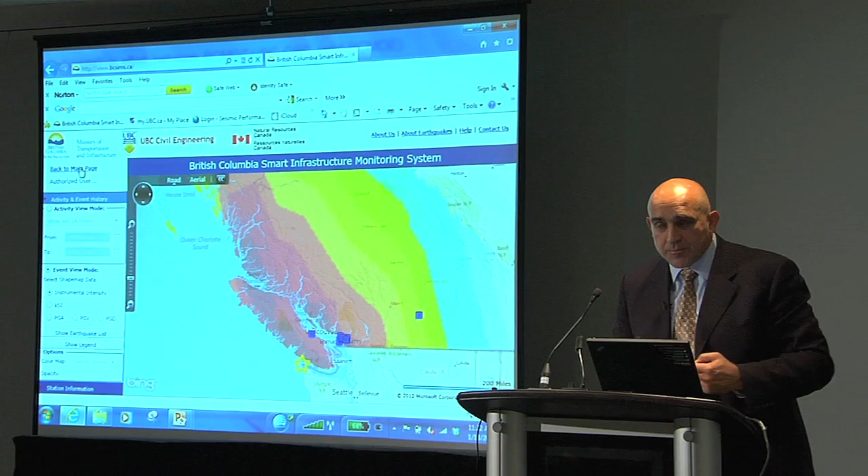So the idea is to generate instant information. In this case, the Ministry of Transportation will use that to identify where are the bridges affected by that earthquake and go and inspect those bridges right away and make a decision whether or not the bridge needs to be closed. And if the bridge is instrumented, UBC will be responsible for issuing a report to the ministry within the hour of the earthquake and tell them what we saw on the bridge and what's the status of that. Okay.

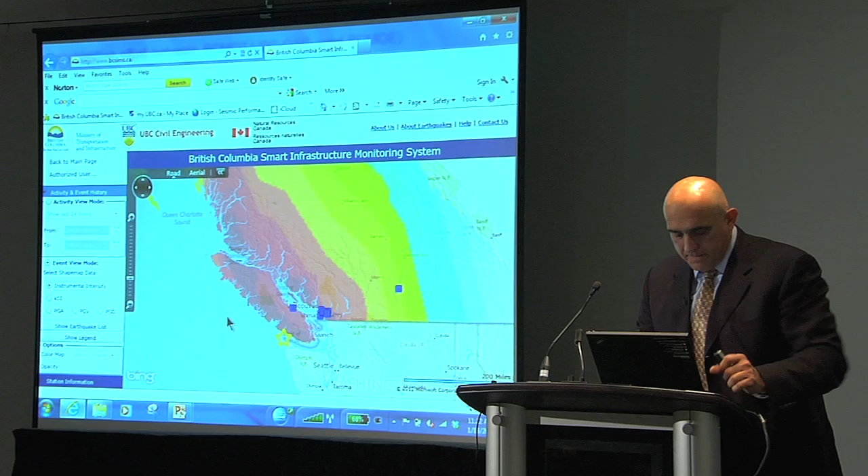The website is available. You can take a look at that. We'd like to encourage you to visit that site and give us feedback, because this is information that is going to be open to the public. There is another level of information that is restricted to engineers, etc. But for the public, this is what we are doing, and the accomplishment is shown there.

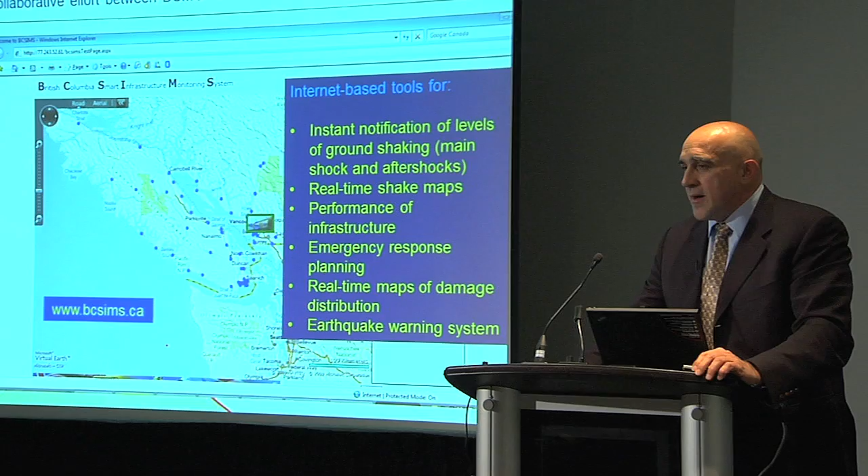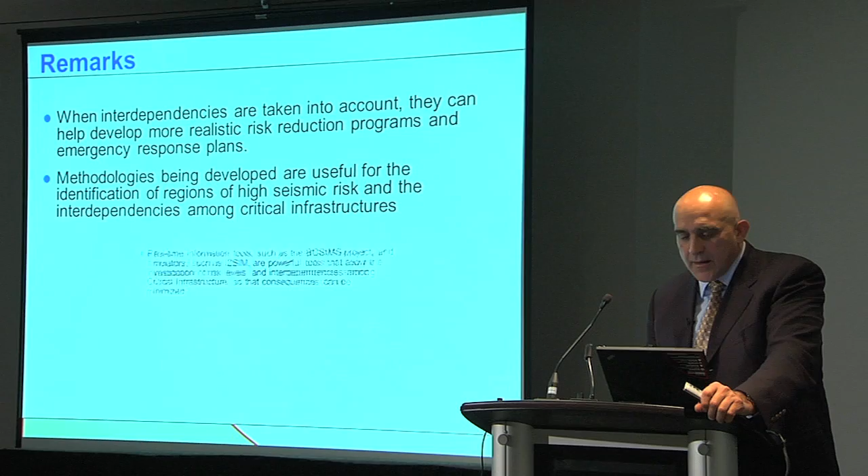So with that, I'd like to thank you and just conclude by saying that when you take interdependence into account, it can help you develop more realistic programs for risk reduction and emergency response plans. We have developed methodologies that are useful for the identification of regions of high risk and how these interdependencies are impacting that region. Tools like the BC-SIMS program or the I2SIM simulator are powerful tools that are bringing us to a next level of understanding earthquakes, how we understand information and what decisions need to be made.

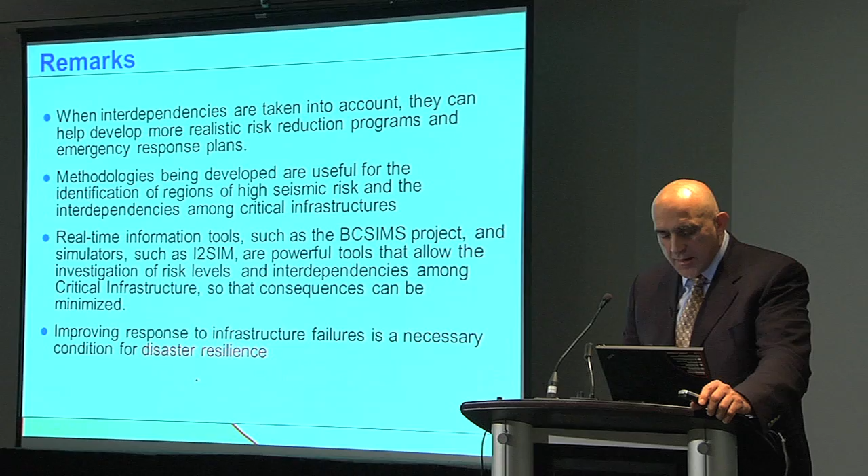And essentially what we're talking about is disaster resilience, how we build resilience in our communities. But never forget that the first priority in disaster situations is human survivability, and this is what we are trying to first address. Thank you.

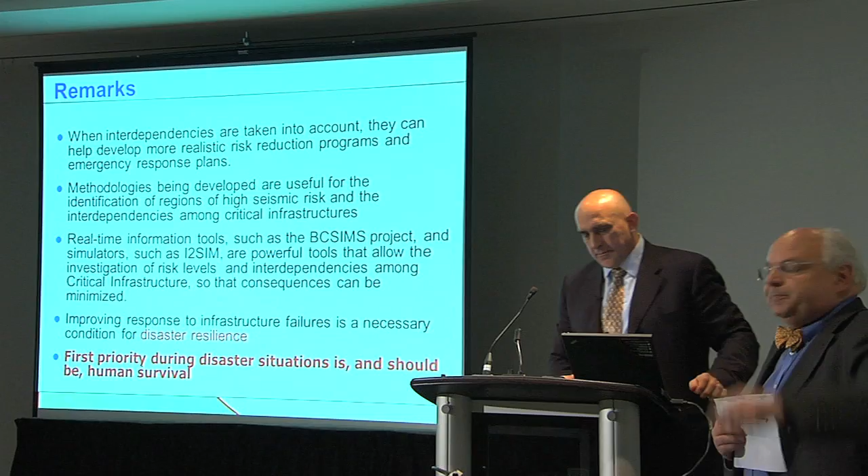Again, Tom Schultz from RSA. I find this really interesting because we've been looking at Vancouver and trying to assess the interdependencies. My boss who's lived there has raised a couple of other points, and I'm wondering about them in terms of your BC-SIMS model. In Vancouver, if you had an earthquake, I believe there's a dam there that could possibly rupture. And if the dam went down and the ground shook, both of the bridges would go out. And in the electrical infrastructure, there are transformers on every wooden pole on the corners. When you're doing an assessment like this, do you think of those types of factors too?